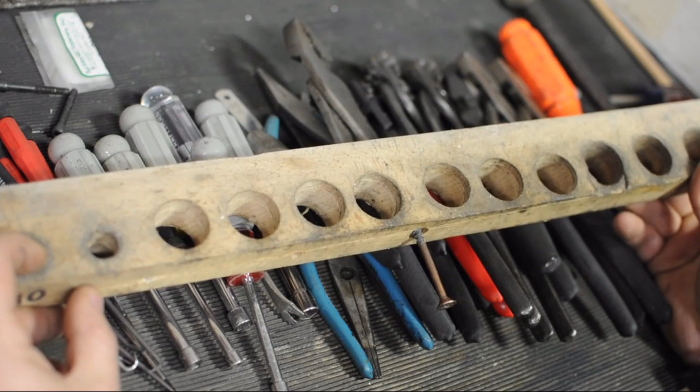But as I mentioned, this might be just a simple enough part to use in a basic CNC walkthrough. A step-by-step without complications of elaborate setups or toolpaths. Something we might instinctively already know how to make with nothing more than a 2x4 and a drill bit.

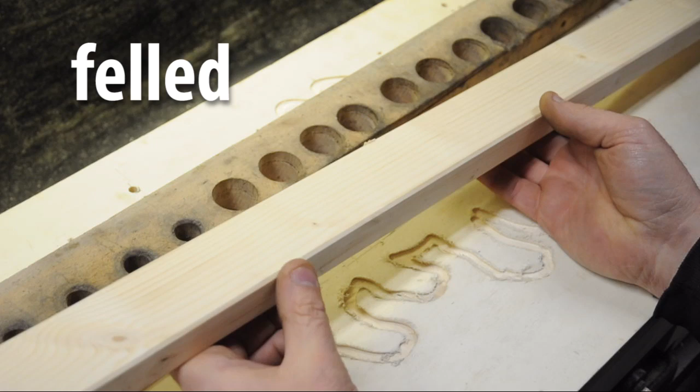Now this is just a piece of pine a little bit longer than the old tool rack. It should just fit in that space that I have for it. I felled this, rough sawn it, kiln dried it, and then planed it to size. Wait, I'm sorry, I misspoke. I meant to say I went out and I bought it.

And what I'd like to do with it is pretty basic. I'd like to keep the nut driver holes and locations the same, because those are the nut drivers that I have, and make the plier locations ovals. And given what oval Forstner bits cost, this is a great job for the CNC router.

To spice things up a bit, I think I'm going to come in and engrave the nut driver dimensions on the front face of this rack. A tad superfluous maybe, but it'll give us an excuse to get into a second setup 90 degrees away from our initial setup. The other thing it'll let me do is mark off the mounting hole locations so I don't have to drill new holes in my wall to mount the new rack.

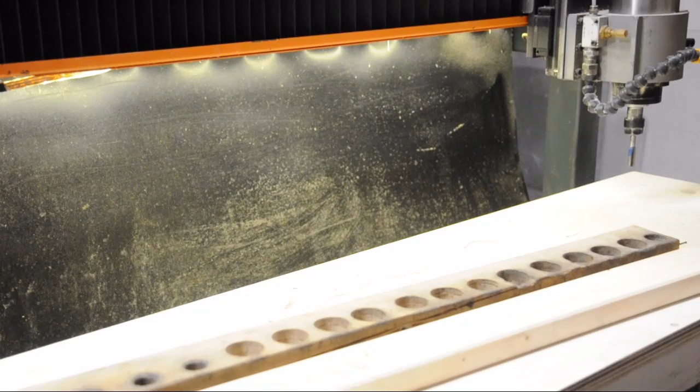Now, to make up for the fact that this isn't the most exciting part to be machining on our CNC router, just for this video, I went out and I bought you guys a kitten.

Now, just to set the stage, as I mentioned in part 1 of the CNC Basics, we're going to be using a CNC machine. The CNC machine is not a CNC machinist. It's still up to us, the operator, to tell it what to do step by step. Basically, all the steps we'd go through in making it manually, thought through ahead of time, and turned into instructions that the machine can follow. We're going to need the G-code to make this plier rack.

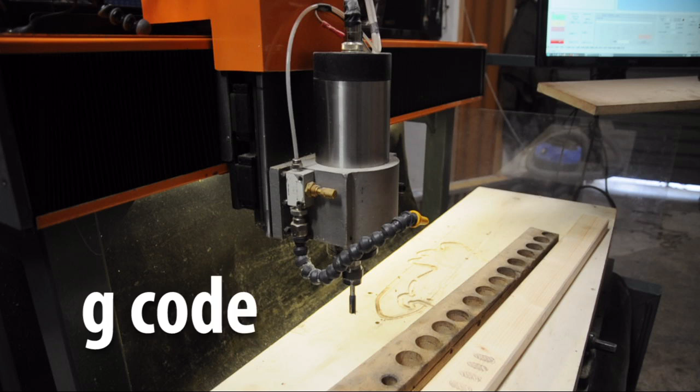And to get that, in this case, we're going to jump into Fusion 360.

So behind every good relationship with a CNC machine, there's a solid CAD model. I've gone ahead and done the CAD already. Otherwise, I'd likely be standing around all day waiting on you bums.

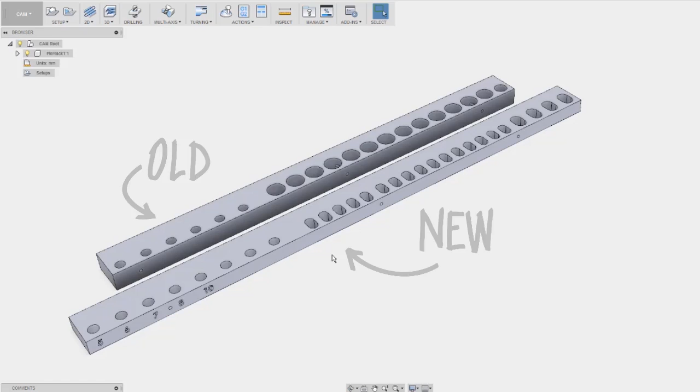Anyway, I've built two models, the old rack and the new. We don't really need the old one for the cam, but I want it in there as a reference, both to pick up the mounting holes and because I know the changes I wanted to make based off of the original and not necessarily like fixed objective dimensions.

I've got the holes in the rack for the nut drivers, a couple more just for kicks, and then my oval slots for all the pliers. On the front face, I've got the dimensions engraved, and there's 3 holes picked up exactly from the original plier rack. Again, so I don't have to drill new anchors in my wall.

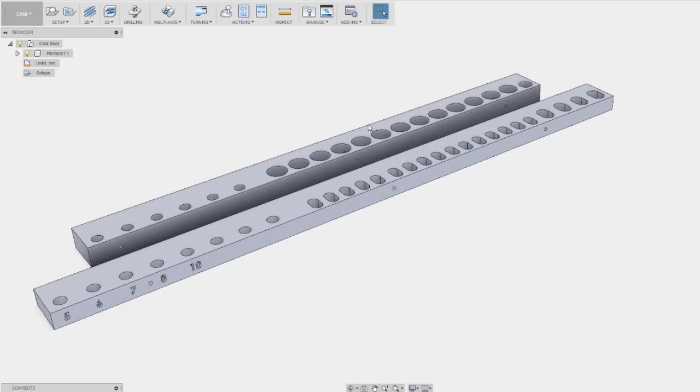I'm already in the cam module. The actual CAD would have been done here in the model space. You can see you just click through between the two. But let's jump back into the cam space.

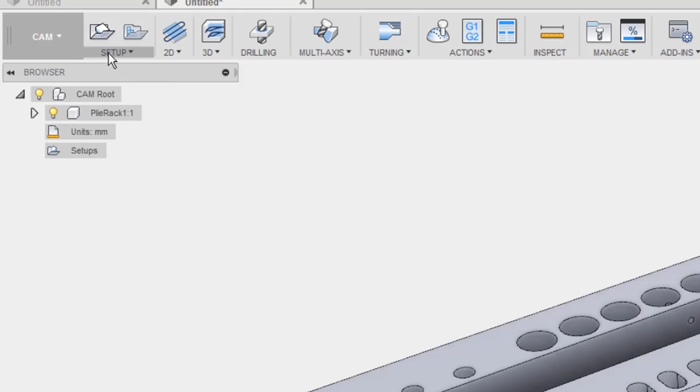We get our cam toolbar up along the top. Now the workflow here is more or less as it would be standing in front of a milling machine. The first thing we'll want to do is create a new setup. We get the setup palette pop up on the screen, and as is common in Fusion, the way to work with these pop-up palettes, well in my case they pop up, it depends how you have them set up.

You'll want to work through the tabs sequentially, starting from the top and going down to the bottom. You may not need all the tabs or all the options, but that's the general workflow. Start at the first tab, work your way down, go to the second tab, work your way down, go to the third tab, work your way down. That should give Fusion all the information it needs to make the part you're trying to get out of it.

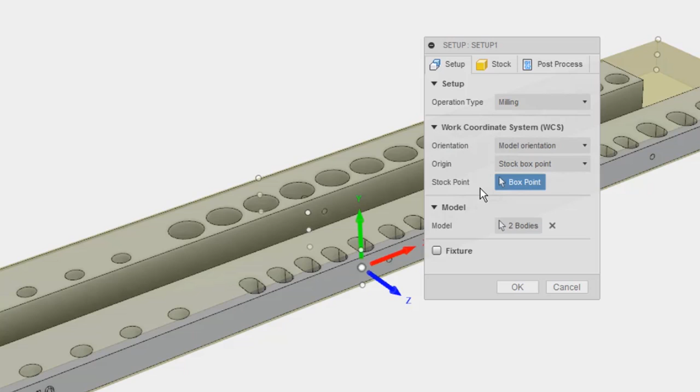So just working down a step at a time. The operation is a milling operation, that's fine. In the WCS, the work coordinate system, we'll just want to set up how the part is oriented on our machine. You can see the default has the Z-axis pointing towards me, towards the operator. We want that to point up with the X direction pointing to the right. We basically want to match how our physical CNC machine is set up.

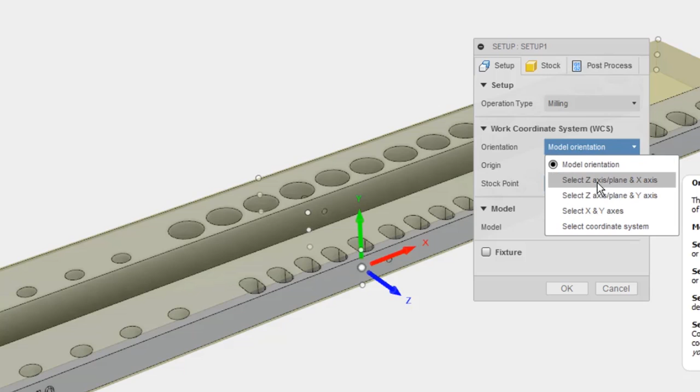In orientation, you have quite a few options to do this. I'm going to select Z-axis plane and an X-axis direction. When I click on that, it'll ask me for the Z-axis plane, and I can pick the top of my workpiece. You see the Z-axis has now popped up vertically, and the X-axis looks like it's in the correct direction, so I don't really need to do anything there. You could flip that, for example, if your machine is set up a different way. Usually the X-axis is positive off to the right.

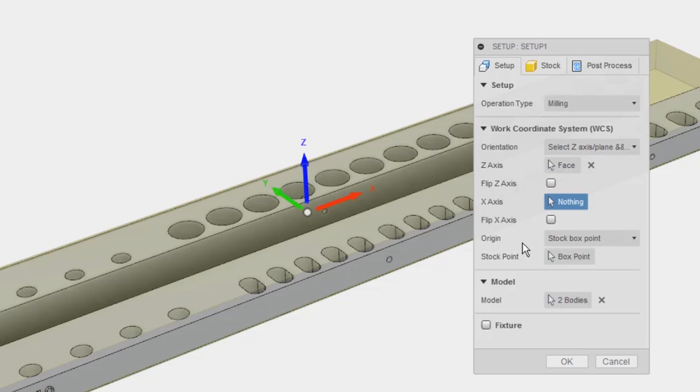Before I pick the origin, I'm going to go down into this model area. It's currently got 2 bodies. Again, we don't need the old rack, so I'm just going to X that out and pick just the body I'm interested in for the CAD. That will ignore all the other CAD in the CAD space, and the cam will be based off just this model selection.

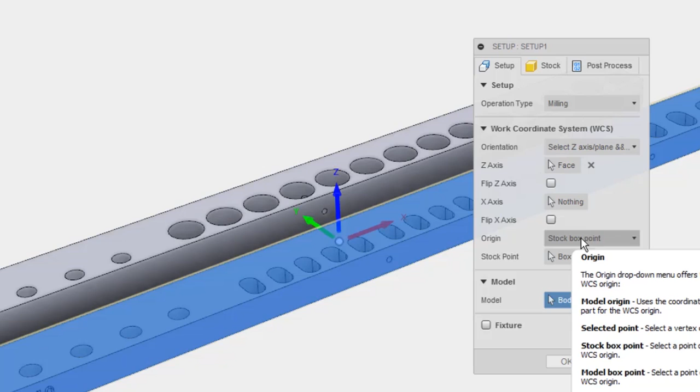Now I can go back and pick the origin I'd like to use, selected point, and come back to the left top corner of what will become my new plier rack. That does it for the first tab in the setup palette.

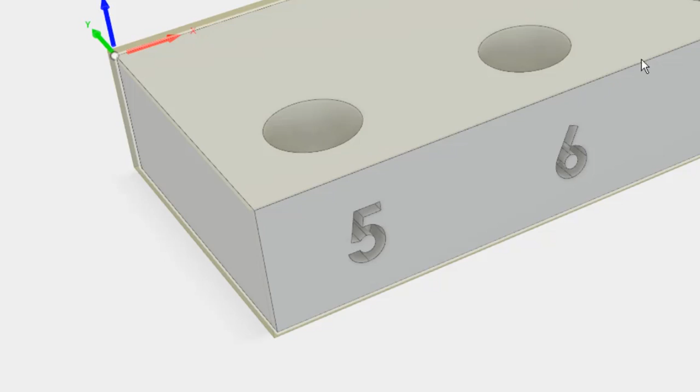In the post-process tab, you can add some information. We'll have a chance to do this when we export the G-code, so I don't usually worry about this tab. I hit OK. Just for clarity's sake, I'm going to go up and hide the old rack, just turning off that light bulb. So we've got our first setup 1.

Again, it's just like you're standing at a machine. We've basically set the work up on the milling machine table or in the lathe chuck. The work is ready to go in the orientation that we'd like to machine it.

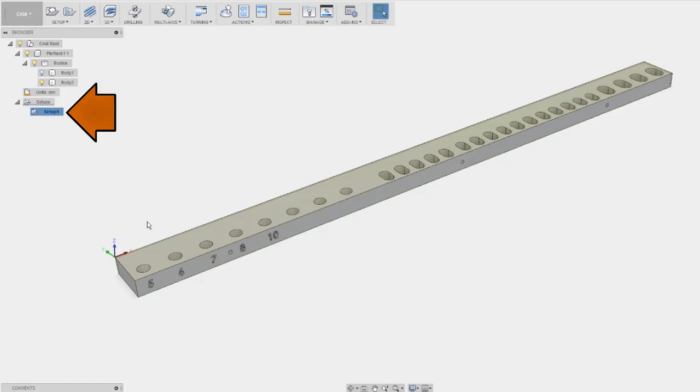The next step may be to load the tool you're going to use, the end mill of the right size, the proper stick out, etc. So let's go up to the Toolpaths menus. After setup, you get 2D, 3D, drilling, etc. You can have fun exploring those yourselves. But since this is a simple, basically pocketing operation, I'm just going to use 2D.

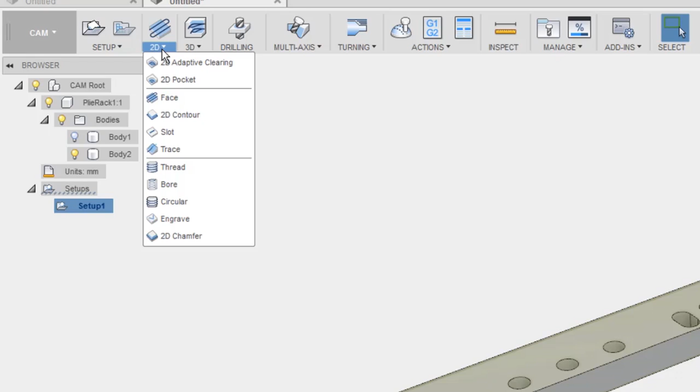I guess we could try adaptive clearing. A lot of these toolpaths or toolpath strategies will get you to the same end result - like we'd still end up with the same pockets and holes. It's just different toolpaths may be better suited to the type of geometry you're trying to do. There's little pop-up descriptions that are pretty handy. You can fool around with them, but most of them are pretty straightforward - slot, 2D contour, face. They put some thought into naming their toolpaths.

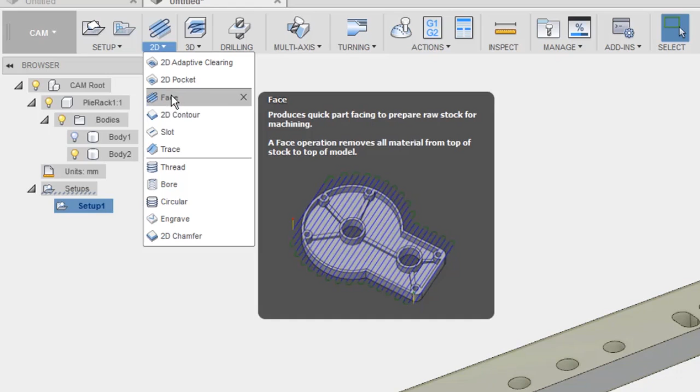Let's try 2D adaptive. Again, we get another palette pop-up, and the first thing it asks us for is to select a tool.

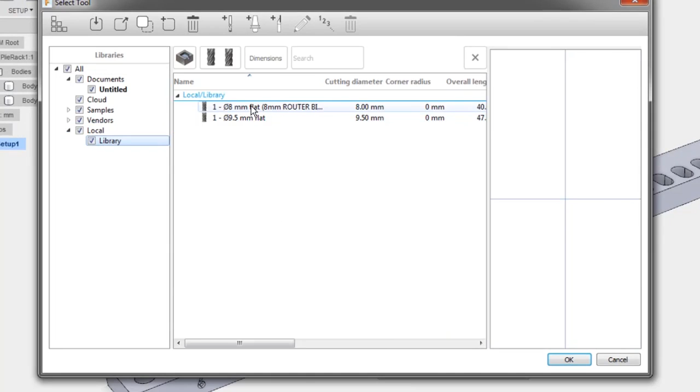It'll obviously need that tool information to be able to generate the toolpaths, decide how fast it can move it, where the tool might fit, etc. I hit select, and I've already got these set up in my local library. I'm going to be using an 8mm flat, basically a router bit.

And just like the other menus, we'll want to work our way top to bottom, left to right through the tabs. I don't want any coolant. All of this other feed and speed information has been pulled in from the tool library. I just give it the once over. Everything seems to look okay.

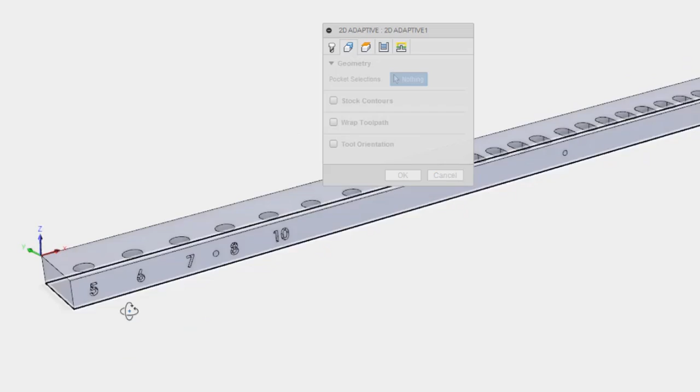Once we're happy with that tab, we'll click over to the next one, and here it's asking us for the geometry that we actually want to machine. I'm going to go through and just sort of pick the bottom of all the holes that I'd like that toolpath to clear out. None of these other options are really relevant to what I'm trying to do, so I'll move on to the next tab, which is the Heights tab.

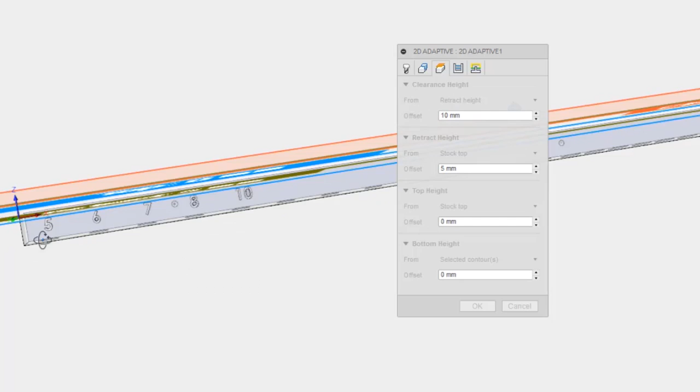The Heights tab shows you sort of visually the planes where the tool will reach during the machining process. I would have expected this blue plane to appear at the bottom of my work, but I'm just going to go down to bottom height here and change that to stock bottom. To make sure the tool gets all the way through, I'm just going to give it a bit of a negative offset, maybe -1. That now will tell the tool to drop a little bit lower than the bottom of the stock just to make sure I make it all the way through.

The other planes are more or less clearly labeled: retract height, top height, clearance height. That's where the tool is going to be flying around as it moves from one feature to the next. So this looks good. Let's move over to the last two.

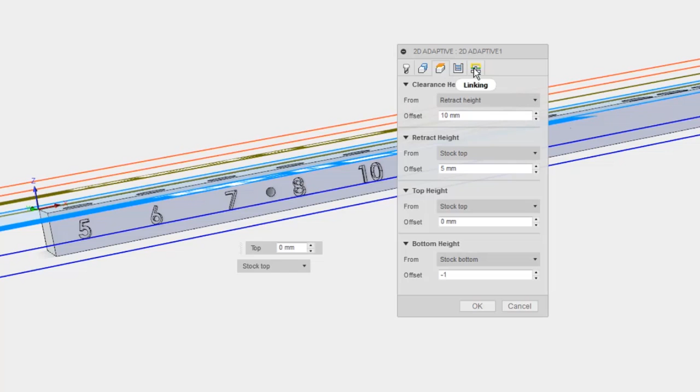Now the last two, passes and linking, refer respectively to essentially where the tool is. So while the tool is in the work cutting a feature, that's all of the passes tab. When the tool is not engaging the work, it's not cutting the features, it's sort of helixing in or flying out or flying to the next pocket, that's all in the linking tab. So let's do this one at a time.

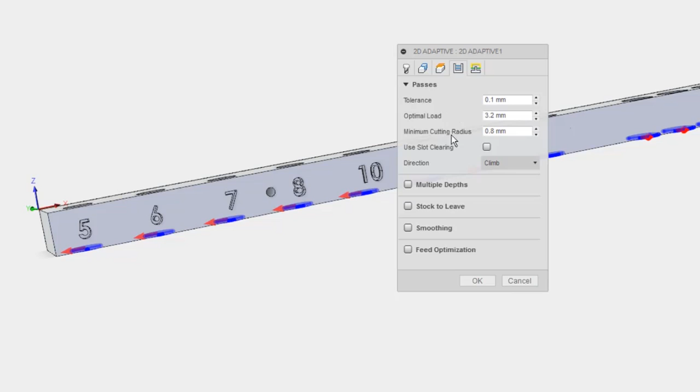In the passes tab, I don't want to leave any stock. I know I'm sort of jumping down the list there. You'd leave some stock if you wanted to come back for a finish pass. I'm going to leave all these top options at their default. Climb milling is fine. I do want to turn on multiple depths. I'm not going to try to route a 1-inch thick piece of wood all in one pass. I'll leave that at 10 millimeters and see how that looks. So it should do it in 2.5 depth cuts.

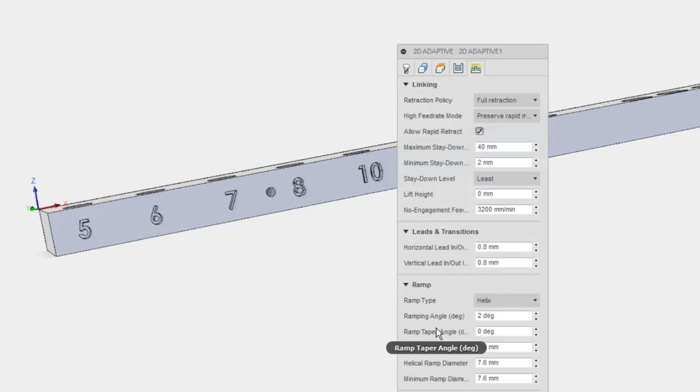Unless I want to do something very specific, I usually leave the linking at its defaults. It's going to helix into the cut with these parameters, the helix diameter and pitch and ramp angle, all that kind of stuff. I usually come back and fix this if there's a problem when it generates the toolpath. At this point, I'll hit OK and let it sort of crunch through it. If you look up on the left here, there are some percentages as it's making its way through the toolpath, and we'll wait for it to give us the preview of what it thinks we've asked it to do.

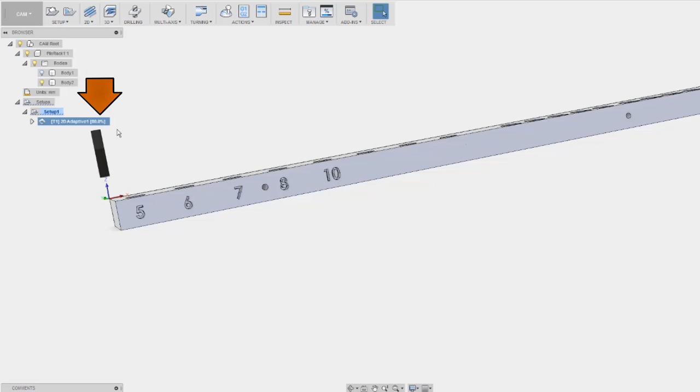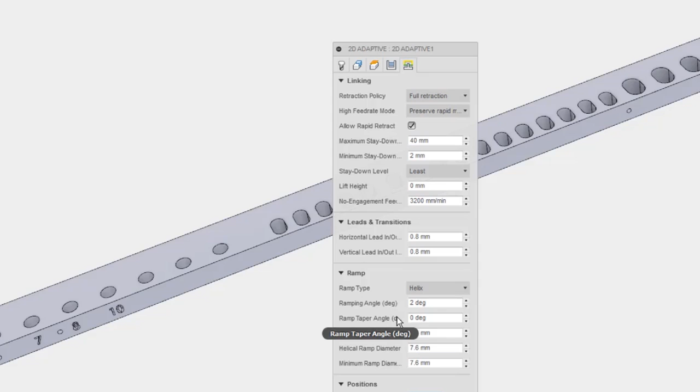All right, so right off the bat, you can see we have a problem. That toolpath is only going to clear out the first 4 larger slots on the far end of the plier rack. That's obviously not what we wanted to do, so we'll go here and edit. And from experience, I can tell you that's being caused by the diameter of my helix. So the tool won't fit into these smaller pockets because I've told it to come in with a large ramp diameter with an 8mm bit, and the pocket's not big enough to accommodate that.

So I'm just going to drop this diameter down to maybe half that. This is soft pine, so it's not really a big deal. I'll hit OK, and it'll go back and recalculate that toolpath. So that looks a lot better, at least from here anyway. It's hit all the features we intended it to.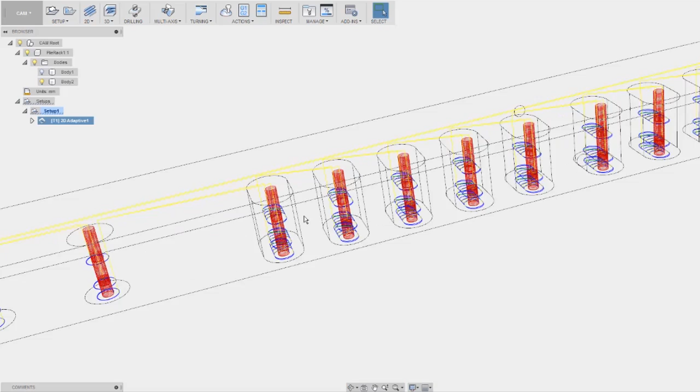Now I'm just going to change the display, I guess wireframe, and we'll take a look at what it's doing. So it's ramping down, sort of helixing, down to that 10mm depth, cleaning that pocket out, coming down another 10, cleaning it out, coming down the last 5 or 6 to get to the bottom here, and finishing that particular pocket. It'll then pop out, move to the next one, all the way down the line.

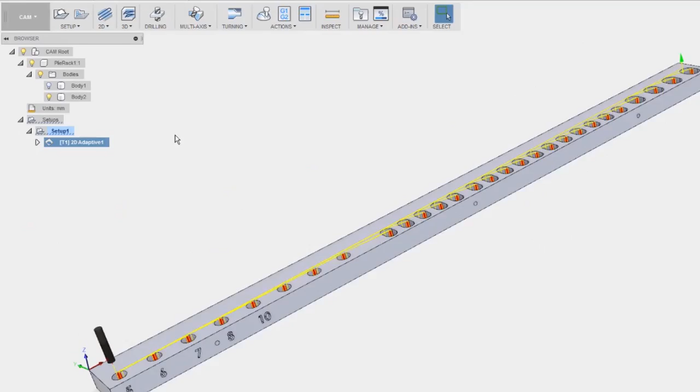Now, although that would be more than sufficient for my plier rack, I'm just going to trick it out a bit with a bit of a chamfer. I just want to knock off, quote-unquote, the sharp edges of all those pockets. Just like before, we get the toolpath menu, and it asks us to select a tool. I've already got one defined. I've got a 1/2 inch, I'm working in metric, but it's essentially a 1/2 inch V-bit for my router. I hit OK. The speeds look more or less all right.

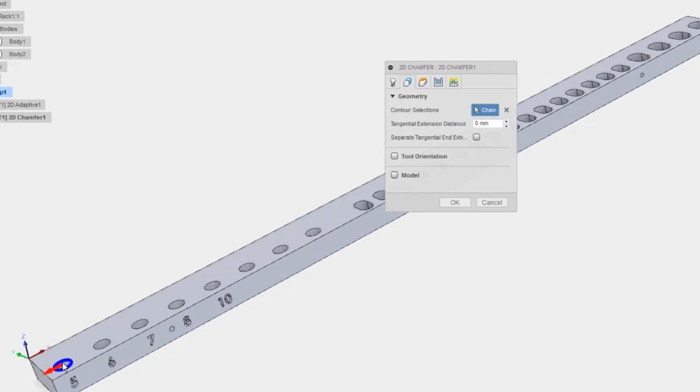Click over to the geometry tab and just pick the edges that I'd like to break. I don't really need to worry about the heights tab in this case. I'm going to jump over to the passes tab and into the chamfer dimensions. Let's say we give it a 2mm chamfer. The chamfer tip offset, I think if you hover over it, there's the graphic.

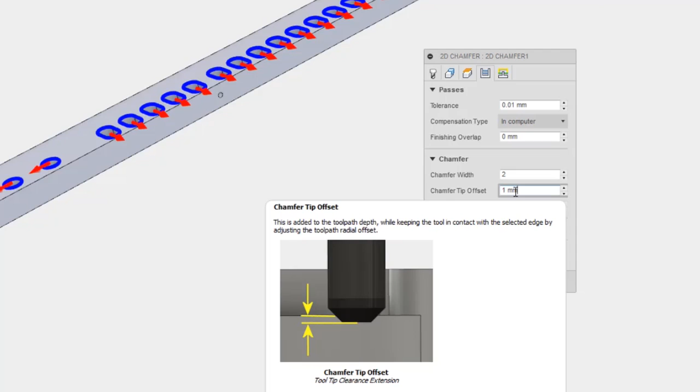It's the amount you want the chamfer tool to kind of come down into the feature before it starts to cut the chamfer. Like how high up the side of the chamfer tool you want to set the machine to cut. It's a V-bit. You wouldn't want to leave this at 1 because you'd be working at the very tippy tip of the tool. I'll just drop that down, 3 millimeters maybe. Hit OK. Let it generate, and we'll take a look at what that looks like.

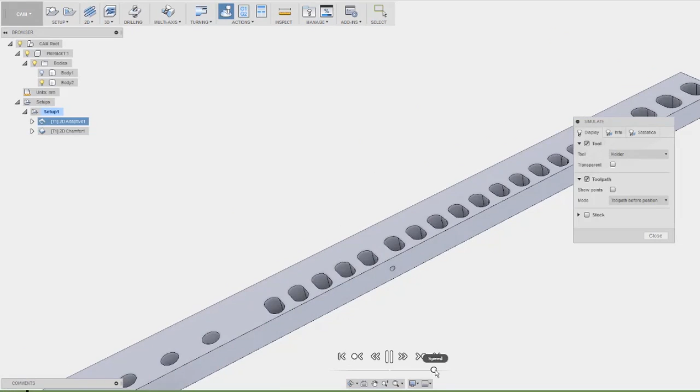So there we see the preview of the V-bit. It's coming down to about this position, working its way around, and it should knock a 2mm chamfer on these edges. If you'd like to see that, you can right-click and have it simulate the toolpaths. Here you can hit play at the bottom and sort of scrub through what it's doing and change the speed. But I like to just click ahead, kind of go to the next track directly, see the end results.

Show the stock. We'll zoom in here, turn the quality up to high. I'm just trying to get an idea of what that chamfer looks like. That looks aggressive. I think I'm going to go back in the toolpath and drop the size of that chamfer a bit. In the chamfer settings, maybe it's this clearance. I'm going to drop that down to 0.

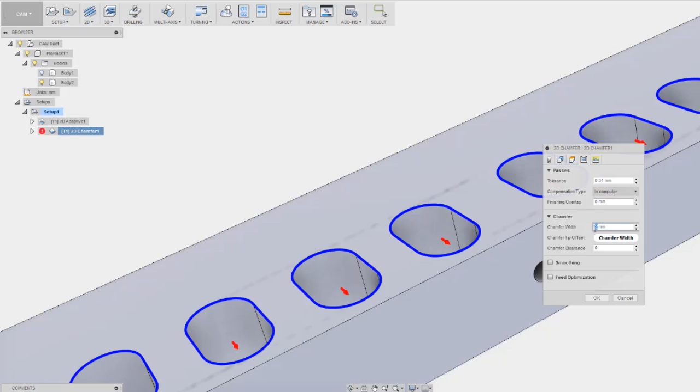The clearance is just to make sure you don't run into other features that may be sticking up. Say you have bosses coming up out of the top surface. Since this is just a flat piece of wood, I don't need to worry about that chamfer clearance. Nonetheless, I'm going to drop that chamfer down to 1.5. Hit OK, and we'll simulate just that chamfer now. I'll skip ahead. And so there's what the chamfer operation will look like if we hadn't taken the pocket out beforehand. It looks good to me.

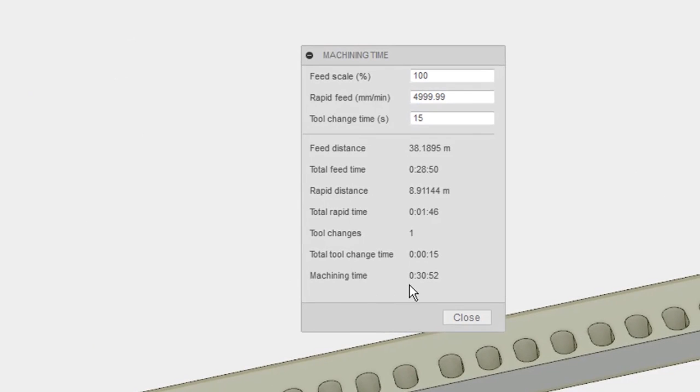At this point, I like to check the machining time. So if I right-click my setup, select the machining time, it gives me an estimate of how long I'll have to wait for it to make this part. In this case, almost 31 minutes. That seems a little excessive to me. It's soft wood. I can probably override that feed rate in the mach software and get that time down. I hit close, and that does it for our first setup.

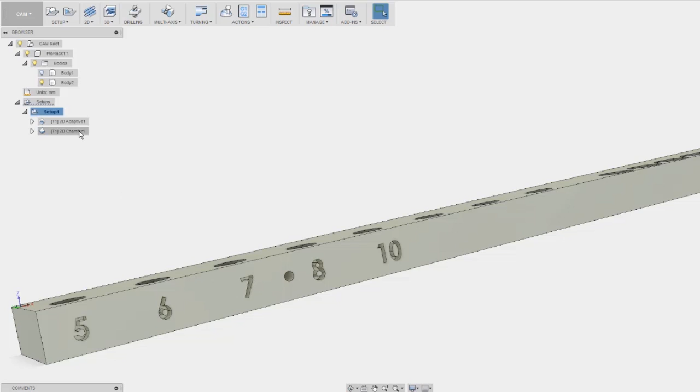Next up is the front face here, in particular the size engravings and the 3 holes for mounting the thing to the wall. Again, just like you do in real life, you have to make a new setup. In our case, we'll have to rotate the work 90 degrees, so the face we want to work on is pointing up. New setup, and it's the same story as before. For clarity's sake, I'll jump to stock, remove the stock offset, go back to setup, and now pick the same z-axis and go through the same steps. Pick my z-axis plane and my x-axis direction.

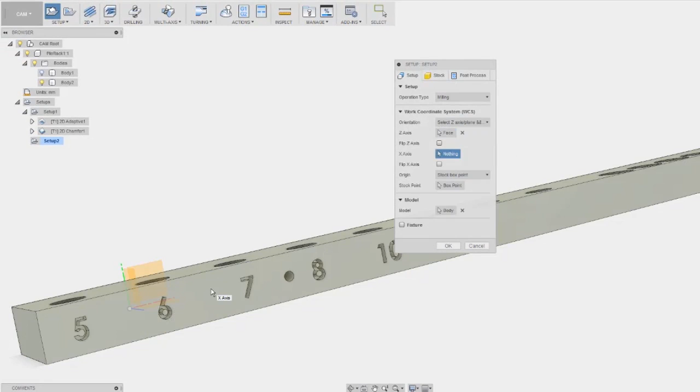Again, it's kind of got it right. I just want to move the origin to the top left corner. In setup 2, I'm going to maybe cheat a little bit. I'm just going to use one tool, engrave the numbers, and just kind of spot where the mounting holes go instead of switching through to a drilling operation. With the riser block, I'm not sure if I have the clearance on this machine to actually load the length of drill to get through this part, but it's easy enough to just hit that with a hand drill.

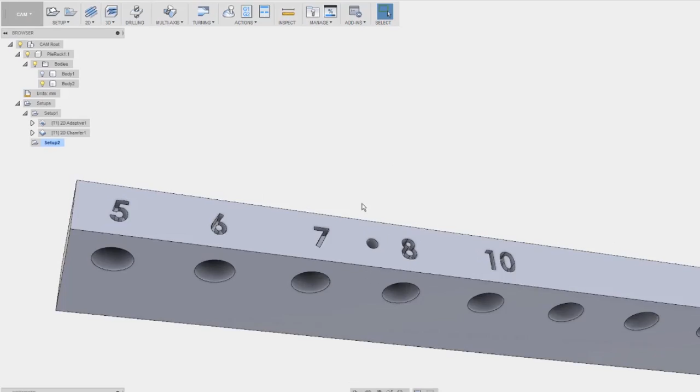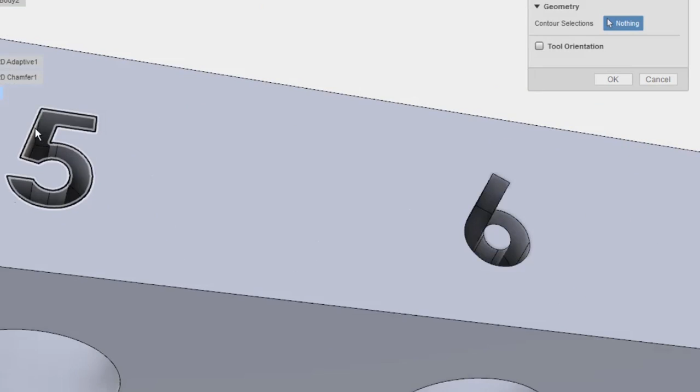So in 2D, I'll pick an engraving operation. It's already got my last tool in there. That was the V-bit that I used to chamfer on the first setup. So I really just need to go in and select the geometry. Now these are just extruded cuts. They go pretty deep, but the engrave tool is only going to cut as deep as the width of the cut will allow a V-bit to go, right? It'll come down, and when both sides of the V-bit hit kind of the bounding blue lines, that sets the depth. Being sure to pick up all the little islands inside of the numbers.

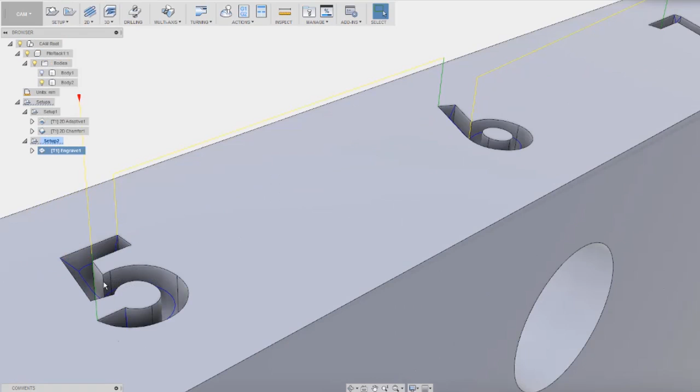As I mentioned, I'll pick the mounting hole locations too, and it'll act as a bit of a spot drill. Hit OK. It should calculate that pretty fast. Well, that didn't go as planned. I mean, it looks like it's doing the engraving well. You see it comes in and even kind of sharpens those corners, but it skipped my mounting holes. So I'll go in and I'll do a drilling operation, again with that same V-bit. Go over into the toolpaths and pick the holes that I wanted to drill.

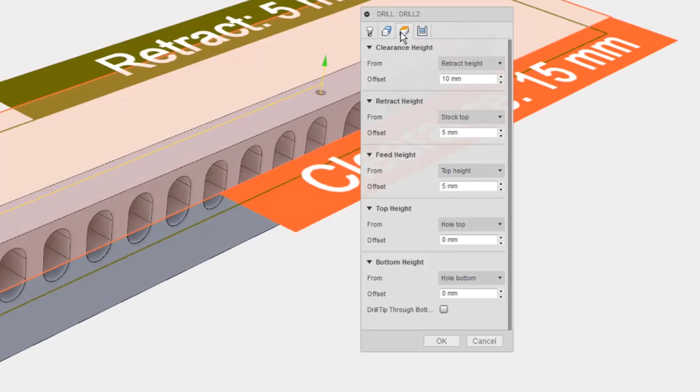The only thing to be careful here is it's now running that V-bit all the way down the hole. Since I only really wanted to spot face the surface, I'm going to go into the heights tab and change the bottom height from hole bottom to hole top and just drop it, I don't know, 40 or 60 thou. Should have been a negative. And now we see the yellow line extends about 60 thou down below that surface. And that pretty much does it for the plier rack.

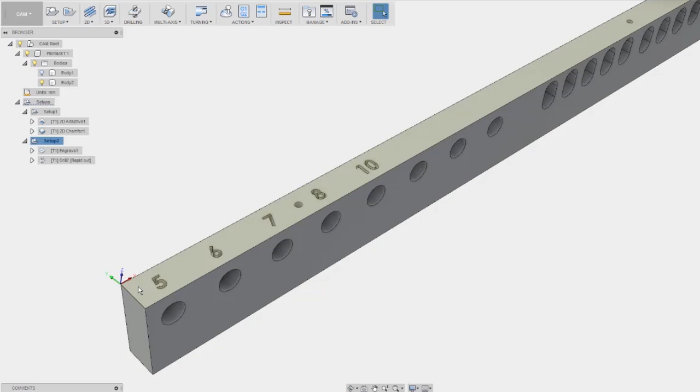I'm going to export these as two separate programs. But if you had, for example, a fourth axis, like an A-axis that could rotate your work, you could set it up so that setup 2 would rotate 90 degrees, present this face up to the router, and continue along your merry way. I'm just going to right-click each setup and post-process. My post-processors are already set up for a Mach 3 mill. I've got a file path. I'll call this rack top and hit post. I'll do the same thing for setup 2, post-process, call it rack front, and hit post. That's it. We have our two programs, G-code for the top and G-code for the front.

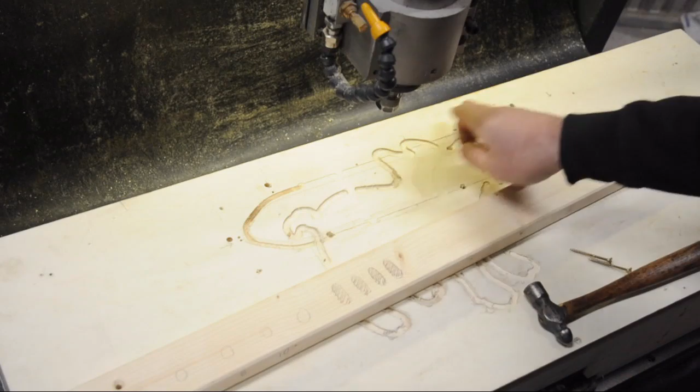Let's get things set up on the router table. I haven't touched this riser since I did the pig cutting board in the last video, so I still have the two dowel locations from before. If I put in a couple of dowels and press my work up against those, I should be close enough to square for this plier rack. Now in my case, I've drilled a couple of holes in each end because I can, but if you couldn't, you obviously would need some other way to fix this to your table. Either clamps, maybe double-sided tape, a vise or three, anything to keep it from moving while you're trying to cut it.

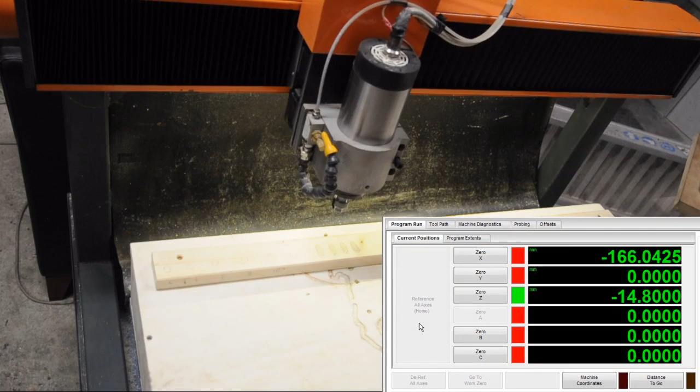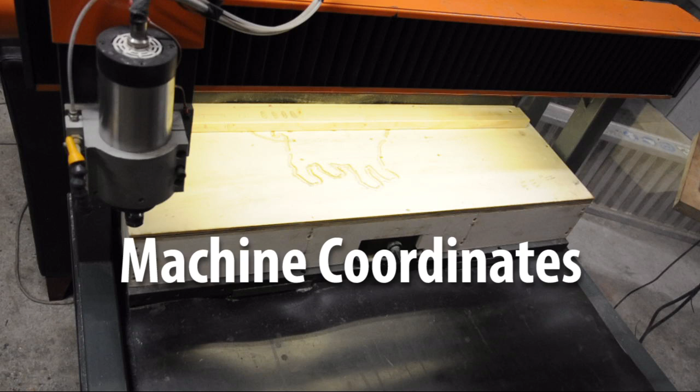Next, I want to reference the machine. Referencing is essentially the way the machine knows how big it is and where the cutting head lives in that available envelope. When I hit the Reference All Axes button, each axis will move in turn until it hits its limit switch. The machine is now at its machine origin, which will be different than our work origin.

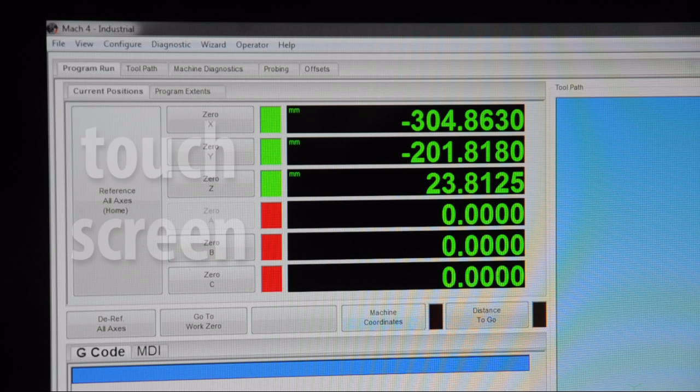Since last we met, I've been making a few small upgrades to my machine, the biggest one of which is a touch screen. I can't convey how much fun it is. It's like a totally different machine to work at. Second, I'm trying Mach 4.

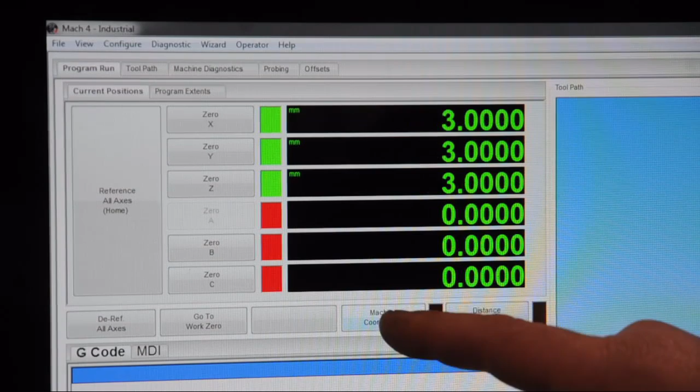Anyway, we just homed the machine. You can see it's at some weird coordinate based on where it started. And if I hit the machine coordinates button, in my case, I'm 3 millimeters off of each axis. So I hit the limit switch and it backs off 3 millimeters. And I can toggle between machine coordinates and sort of absolute and relative coordinates. I'll come out of machine coordinates. I'm going to jog the table to my work origin and zero these axes out.

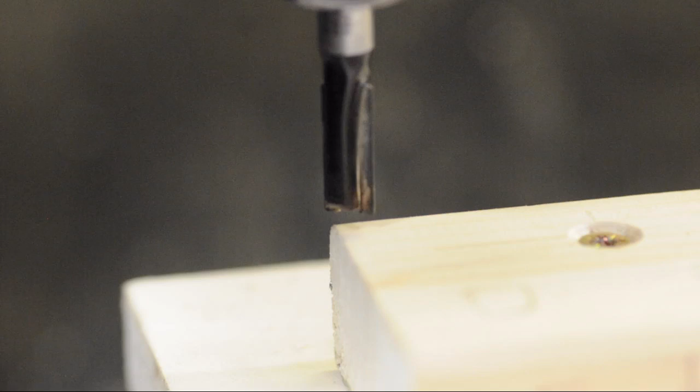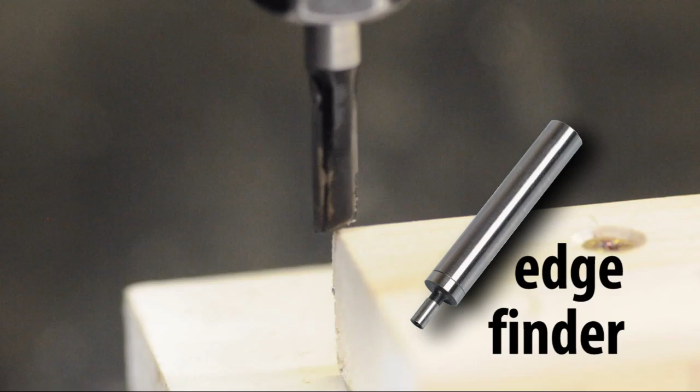Once I'm close, I can sort of sneak up on the origin location that I want for this job. If this were something critical, you'd use an edge finder, of course. And once I'm happy with that, I can just come in and zero my DROs. I should be able to load my G-code and see it in the preview window. At this point, I'd just hit cycle start and let it do its thing.

So in a completely unexpected turn of events, something started to go wrong. Turns out that this piece of lumber has quite a bit of a bow in it. So as my features started to come across, they have gotten dangerously close to the edge. This would have only gotten worse, so I stopped it.

So I've got my only other piece loaded in here. I'm going to run this again. I did make a couple of changes. I found from this run that I can go much more aggressive on depth of cut. I was doing 10 millimeters, now I'm doing this full depth, 1 inch in 2 steps.

I also changed these nut driver holes to circular pockets instead of, I think it was 2D adaptive. That got my cycle time down from 30 or 31 minutes on this original part to something like 8 or 9 minutes on this new part. Live and learn.

Now, in order to proceed to the next operation, the 2D chamfer, the G-code has a tool change command in it. That was also all done in Fusion in the setup. I don't have an automatic tool changer. So the machine has stopped. I've had to manually change the tool, and now when I hit cycle start again, it'll pick up. Before I can do that, I have to zero the new tool out.

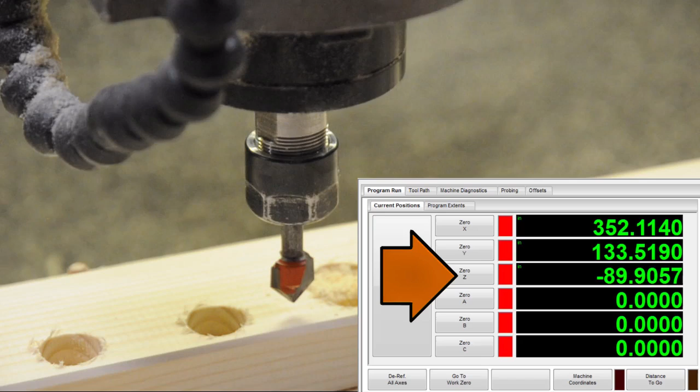So X and Y, it can still keep track of, but it doesn't really know what the new tool stick out is. Like, for example, I could have installed it 1/8 of an inch higher or lower than the previous tool. So I touch off. Here it's not that critical. And I zero the Z DRO. Again, just like you'd be standing at a manual mill. Zero your DRO or zero out your hand wheel.

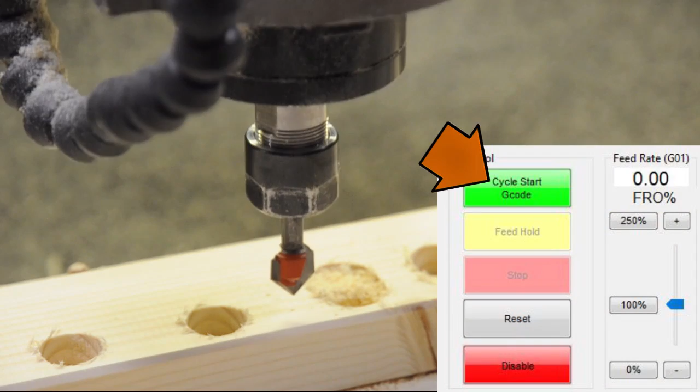If this were more critical, I'd probably use like a shim, a couple of thou, and then just take that off of the Z height. Now I can hit cycle start, and it should fly through there and add all the chamfers.

Before I get into the second setup, just a quick note about that chamfer. I don't know if you noticed, but it turned out a little bit wimpy. So what I did was come back in, drop the tool another 40-50 thou, and reran just that part of the G-code. That just cut a little bit of a nicer chamfer on there. And you can do that by scrolling to the line in the G-code you want to start from and hitting the Run From Here button.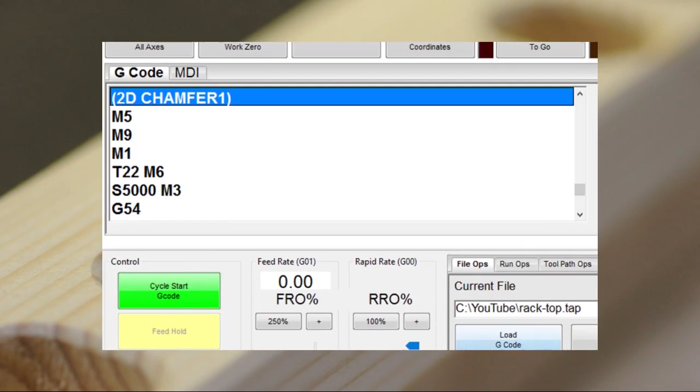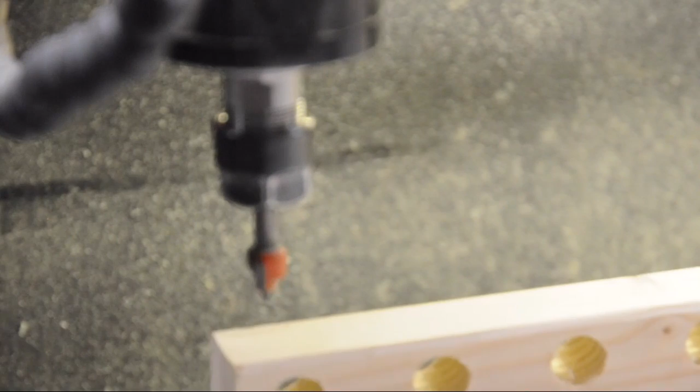And the next step is to engrave and spot the front. In order to do that, I'm going to have to set the work up at 90 degrees. And I've just screwed it to the old messed up rack, and I'll screw this down to the table. Now I just go through the same steps as before, setting the work origin that I like, left back corner in my case, and I zero out the DROs, and I can run program number 2.

All right, so all in all, I think that turned out pretty all right. I feel a lot better about that plier rack.

My daughter found this cat in the bushes, I don't know, a couple of weeks ago. She was waiting for the school bus and I guess heard this thing crying. He was in pretty bad shape, hanging out on death's doorstep. That's what our neighbors call our house. So now I've got a shop cat. I don't know yet if I'm a shop cat fan. I have visions of turning on the lathe and just seeing a big puff of orange hair fly out from behind it.